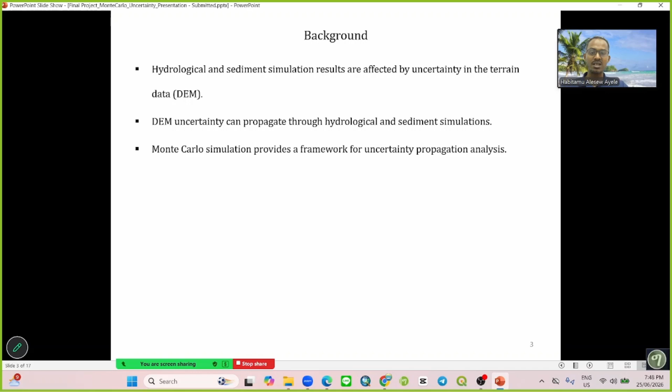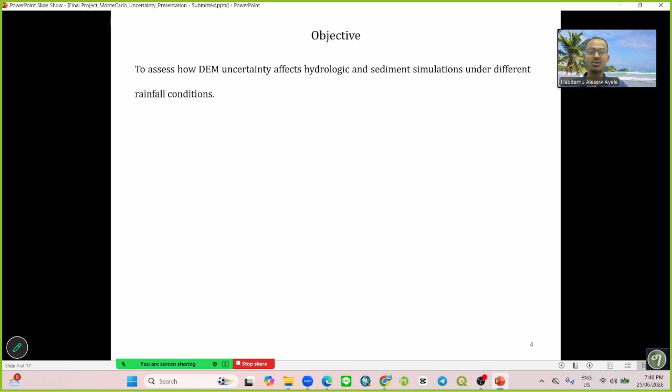When I come to the background section, hydrology and sediment simulation results are affected by uncertainty in the terrain DEM. DEM uncertainty can propagate through hydrological and sediment simulations. Monte Carlo simulations provide a framework for uncertainty propagation analysis. The objective is to assess how DEM uncertainty affects hydrologic and sediment simulations under different rainfall conditions.

The project incorporates Gaussian random noise errors with 10 centimeter standard deviation, which is added to the digital elevation model. 100 perturbed DEM realizations were generated, and slope, flow direction or LDD, and static maps were updated for each realization. Wflow simulated runoff volume and peak discharge, and MUSLE was used to estimate sediment yield. Statistical analysis was performed on 100 Monte Carlo realizations.

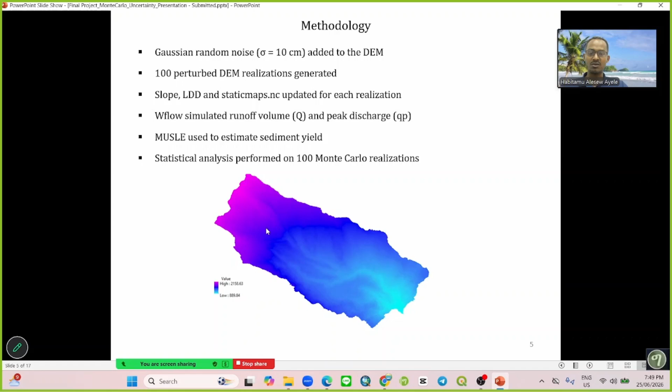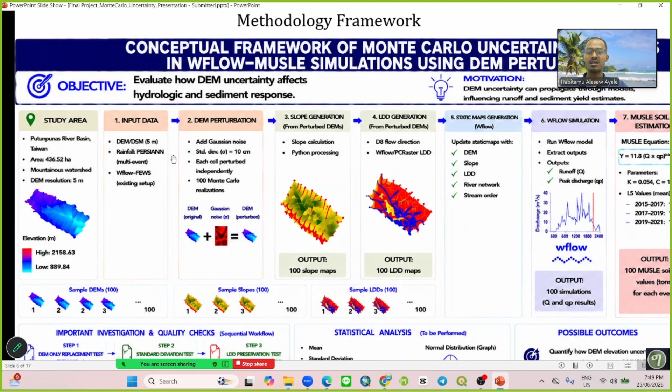So this is the DEM of the project, the Putunpunas River Basin. And when I come to the conceptual framework of the project, it includes the overall methodology of the project. The objective, as I have stated before, is evaluating how DEM uncertainty affects hydrologic and sediment response. And the motivation is DEM uncertainty can propagate through models influencing runoff and sediment yield simulation.

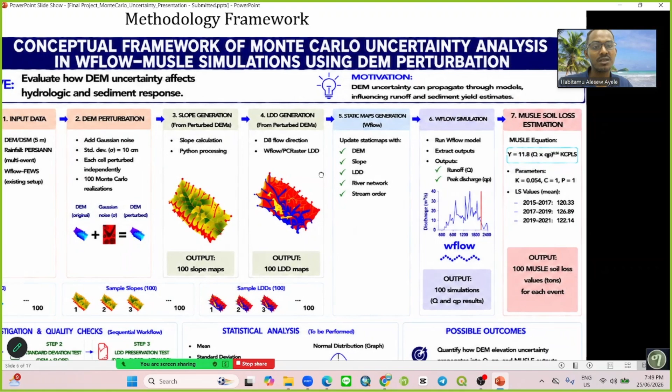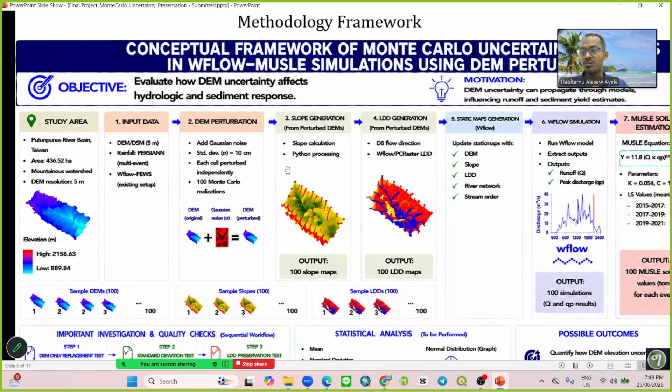And when I come to the input data, Putunpunas River Basin is the selected basin for the project, its area is about 436 hectares, the area is almost mountainous, and the DEM resolution is about 5 meters. Using this DEM, the original DEM was perturbed using 10 centimeter standard deviation error. Using the perturbed DEMs, 100 slope maps were generated, and the flow direction or LDD was also generated for each perturbed DEM.

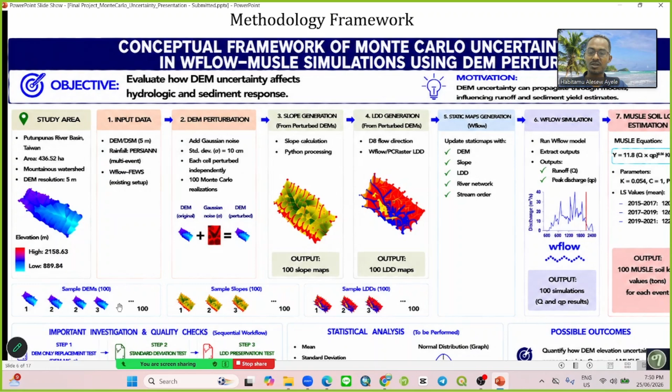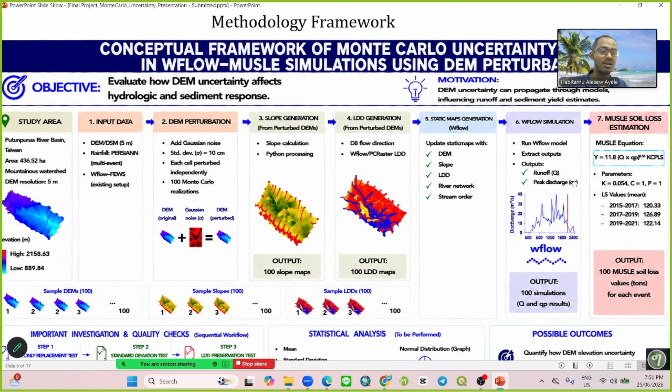Using this, the static map was updated for the DEM, slope, flow direction, river network, and stream order. Finally, Wflow was run, and I simulated the runoff and peak discharge for each of the 100 realizations. MUSLE, the modified universal soil loss equation, was used for calculating the sediment yield using the existing parameters from previous research. So for each event, I calculated 100 results here.

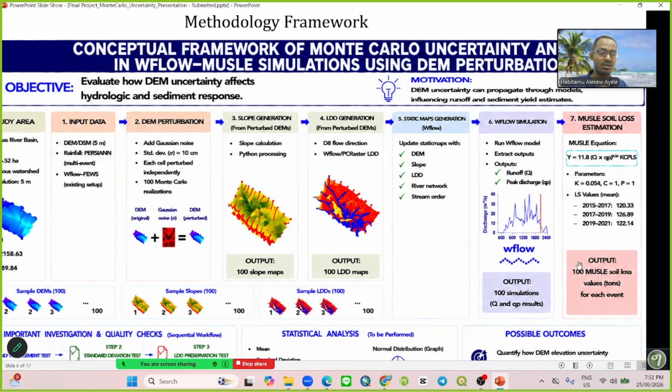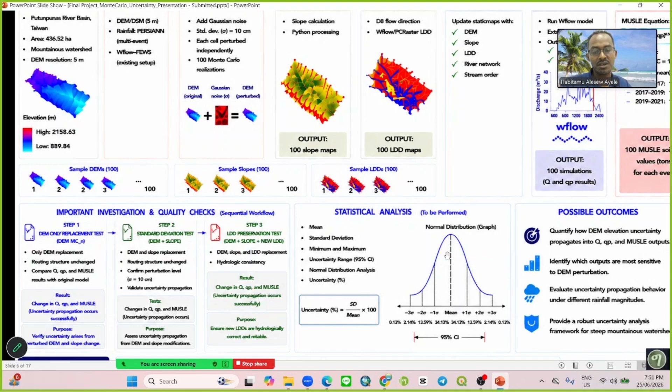And finally, the statistical analysis was performed using the mean, standard deviation, minimum and maximum values, uncertainty range like the 95% confidence interval, and uncertainty in percent. So this is all about the framework.

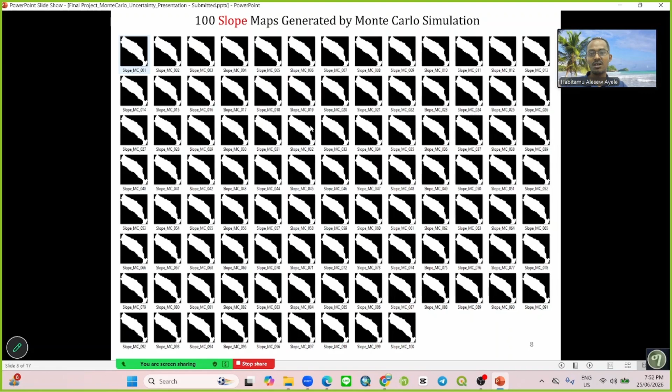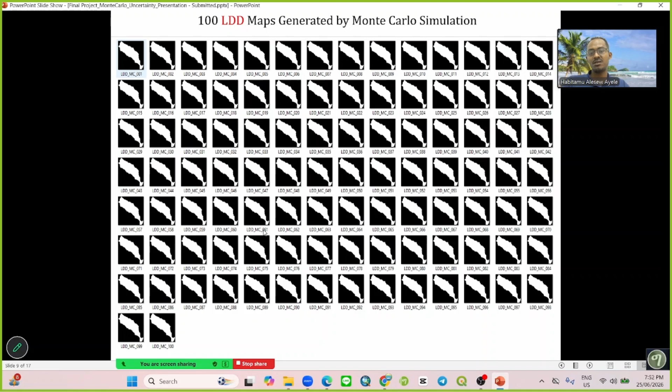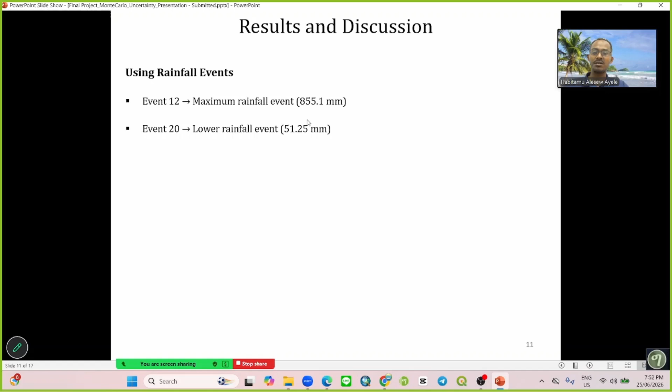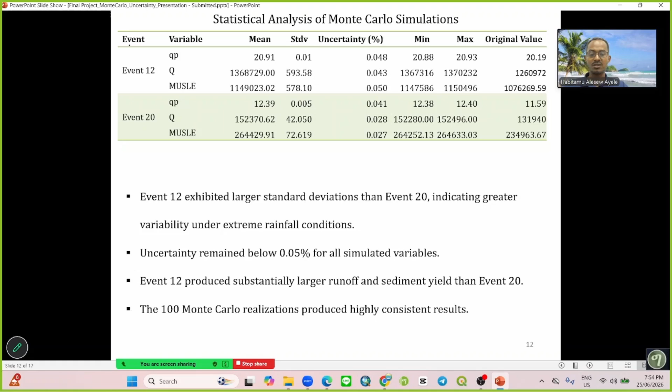From this table we can understand that event 12 exhibits larger standard deviation than event 20, indicating greater variability under extreme rainfall conditions. Uncertainty remained below 0.05% for all simulated variables. Event 12 produced substantially larger runoff and sediment yield than event 20. The 100 Monte Carlo realizations produced highly consistent results.

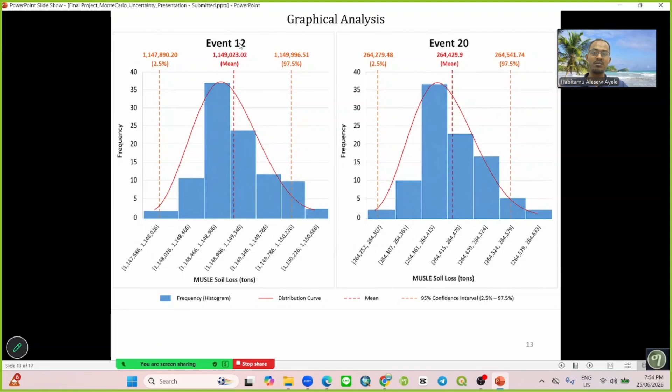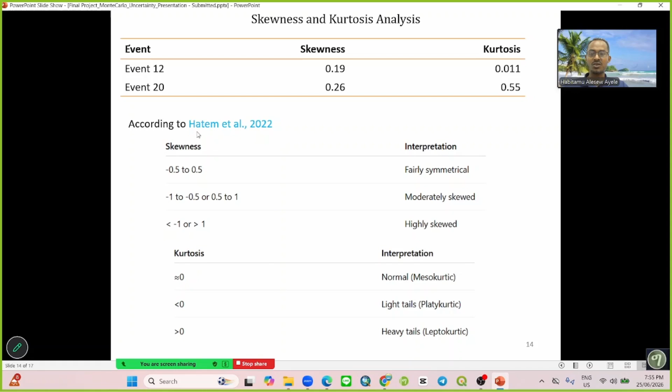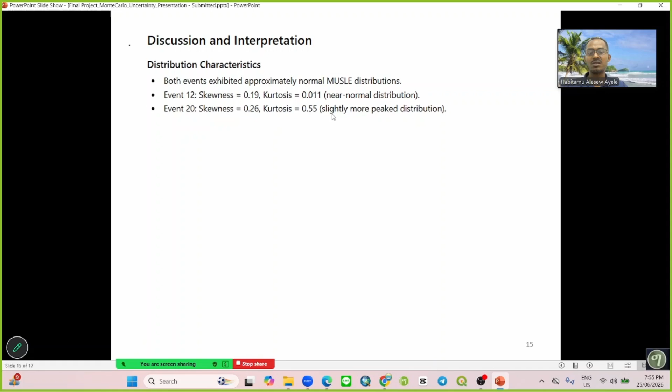When I come to the skewness and kurtosis analysis, the values look like this, based on Hatem in 2022. These are the skewness and kurtosis intervals and their interpretation. In the discussion and interpretation of distribution characteristics, both events exhibit approximately normal MUSLE distribution. Event 12 skewness is 0.19 and kurtosis is 0.01, indicating near normal distribution. For event 20, the distribution is slightly more peaked.

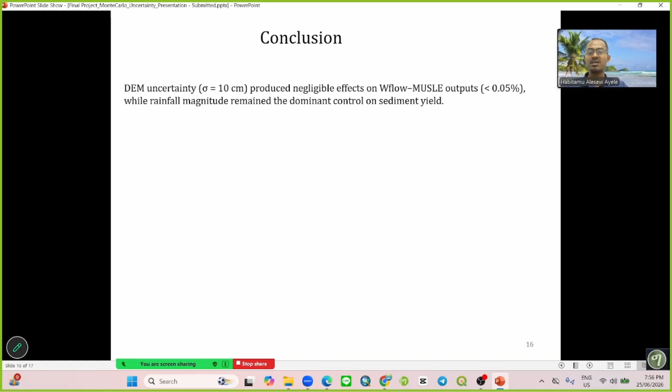In conclusion, DEM uncertainty of 10 centimeter standard deviation produced negligible effects on Wflow and MUSLE outputs, with uncertainty less than 0.05%, while rainfall magnitude remained the dominant control on sediment yield.